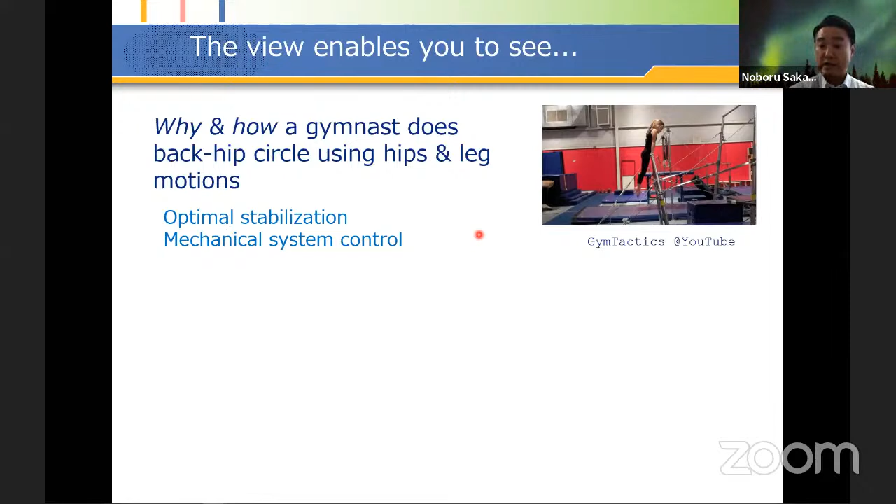Next thing with this view one can see is why and how central banks manipulate interest rates like long staircase signals. We know that oftentimes the Federal Reserve, the European Central Bank, or the Japanese Central Bank manipulates interest rates like this long staircase signal.

So they fix or set a value of this interest rate and let the economics evolve for a long time. At a certain point, they change this rate very rapidly and fix the next value. This kind of control is actually called turnpike, and it arises from econometrics. With this unified view, I hope you will see why these kinds of controls naturally emerge in optimal control analysis and design.

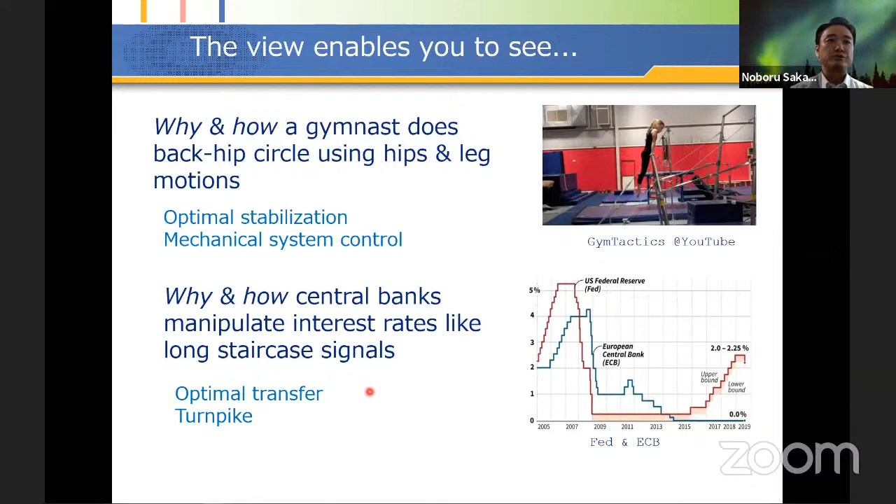For this kind of control, people always want to have some certain kind of optimality. Then we get the Hamiltonian system, right? In physics, the Hamiltonian system plays a very important role in analytical mechanics and quantum mechanics. In this equation, Q and P are often used as the position variable Q and generalized momentum P. In optimal control theory, we also encounter the Hamiltonian system, but this Hamiltonian system does not really have a completely physically meaningful picture.

But in our Hamiltonian system there are two equations. The first one actually represents the physical system, and the second one, for the adjoint variable P, doesn't have a physical meaning, but these are interconnected like this. Actually, this P is related to control, and the control is injected into this physical system, the first part of the Hamiltonian system. So we may be able to think of this Hamiltonian system as our fundamental equation, like equations of motion, and apply many techniques from dynamical system theory.

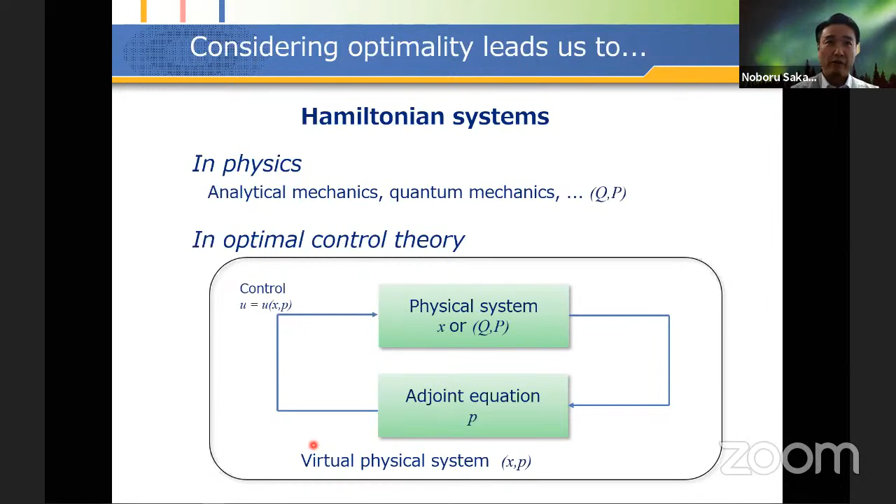Next, let me talk more specifically about these tools from dynamical system theory. For example, Hamiltonian system, Hamiltonian mechanics, and invariant manifold theories are important in this view—for example, volume preservation or energy conservation law, canonical transformation, Hamilton-Jacobi theory, perturbation theory, maybe Poisson brackets. These are also called symplectic geometry in mathematics. Also important tools are invariant manifold theory, such as stable and unstable manifold, center manifold, Grobman-Hartman theorem, and the lambda lemma.

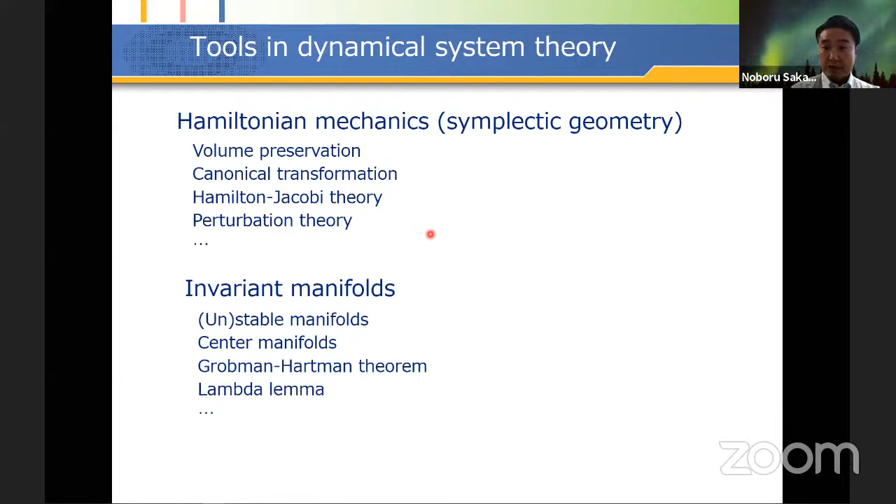In this talk, I will mainly use the stable and unstable manifold and the lambda lemma, but these are actually playing a hidden role in the development of the theory. So let me talk about invariant manifold theory.

Let's consider this ODE, in which the linear part is already block diagonalized with respect to the real part of the eigenvalue. So A is a stable matrix, B has eigenvalues on the imaginary axis, and C is unstable. We can always put any finite dimensional ODE in this form, and these capital X, Y, Z are higher order terms.

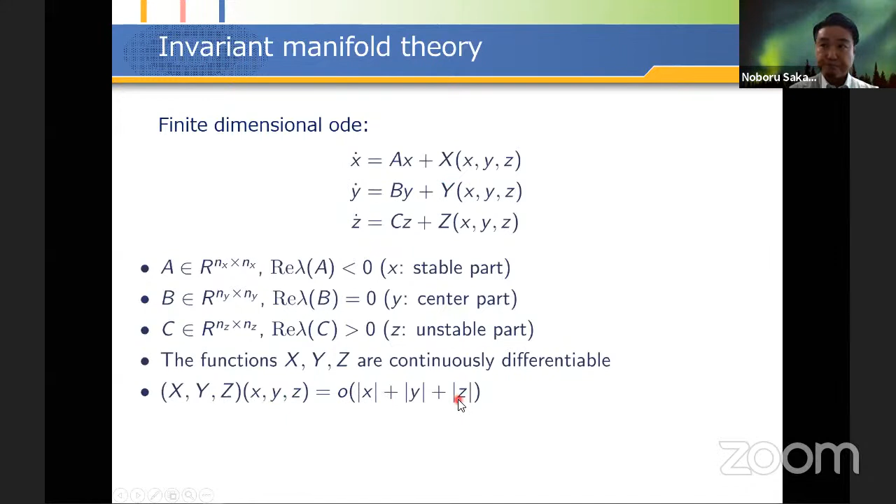Okay, for this system, in 1967, Kelly shows that there exist invariant manifolds, quite a few invariant manifolds. First one is stable manifold, on which X variable is independent and Y and Z are functions of X. On center manifold, Y variable, a variable for neutral stability on the imaginary axis, is the independent variable. On unstable manifold, unstable variable Z is the independent variable. And also center stable manifold, center unstable manifold - these kinds of invariant manifolds exist in this nonlinear system.

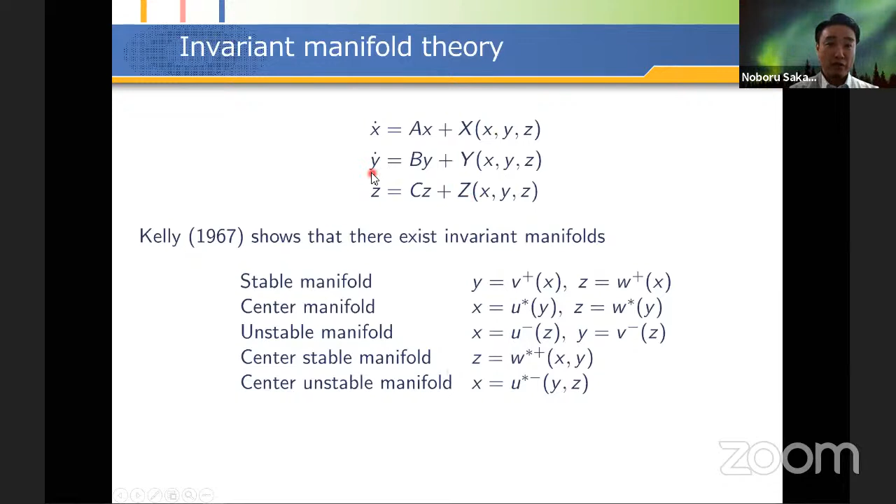And there are several ways of computation that exist. This is what we use for optimal stabilization. So this computation uses iterative computation.

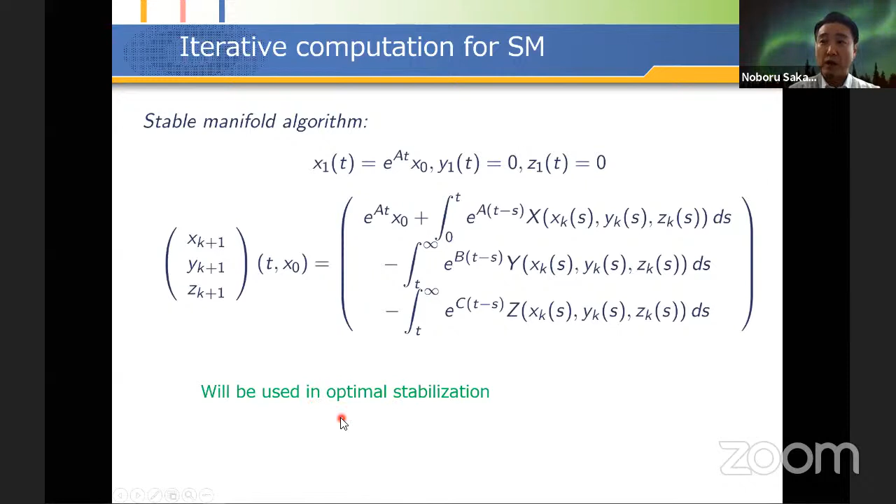Next tool that I would like to explain is a lambda lemma, or inclination lemma. So let's consider this nonlinear dynamical system. This F does not have anything to do with control system F. This is a general dynamical system, independent of control theory. But eventually, this F of X will be our Hamiltonian system derived from optimal control theory. Here, though, this is a totally independent story.

Suppose that this dynamical system is hyperbolic, which means that there are no eigenvalues on the imaginary axis. Then, based on Kelly's result, stable manifold S and unstable manifold U exist. S is k-dimensional - the number of stable eigenvalues is k. The number of unstable eigenvalues is n minus k, in an n-dimensional system. So a k-dimensional stable manifold and an n minus k-dimensional unstable manifold exist at the origin.

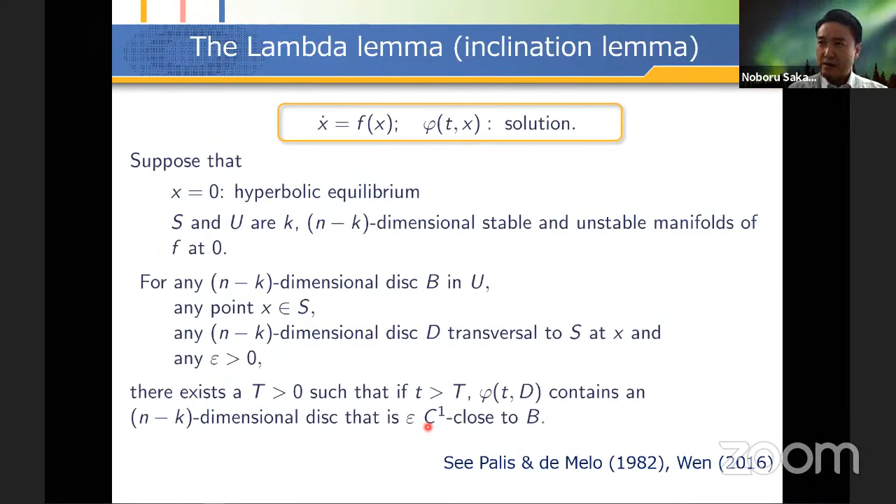It's hard to understand what is really going on, so I draw a simple picture. This is the fixed point, and this is the unstable manifold, this is the stable manifold. So take any B in U, and the dimension of B is the same as U. Take any B, any place is fine, and take any X on S, and take any disk D that looks perpendicular to S - actually only the transversality is important. The dimension of D is n minus k, same as U or B.

Let this D flow according to the flows of the solution. Then this disk D will be mapped somewhere here, and somewhere here as T gets larger, and somewhere here, exponentially stretched like this, and exponentially squeezed toward the unstable manifold U. Therefore, we can always find in the image of D by this flow something extremely close to this disk B. And this closeness can be evaluated using the C1 norm.

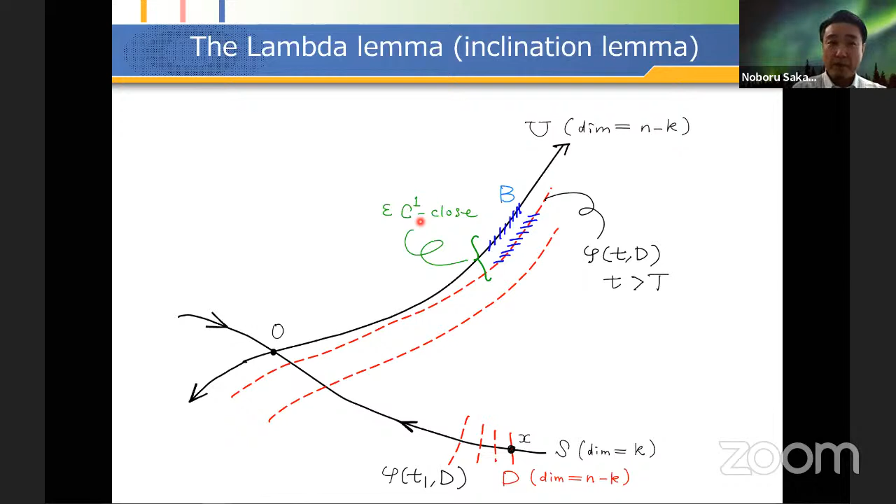Roughly speaking, stable manifold theory only tells you how the solution behaves on this curve or on this curve. But the lambda lemma tells you how the solution behaves off the manifold.

So this is very important to see what can really happen in our Hamiltonian systems derived from optimal control theory. Using this lambda lemma, we can prove this property. Suppose x equals 0 is the hyperbolic equilibrium of this dynamical system, and S and U are K and N minus K dimensional stable and unstable manifolds respectively.

Take any x0 on S and any x1 on U. Then there exists a T0 such that for every T larger than T0, there exists a rho, which can be very small, and y0 in the vicinity of x0 on the stable manifold, and y1 in the vicinity of x1 on the unstable manifold, such that this holds. This means the solution of a two-point boundary value problem has a solution.

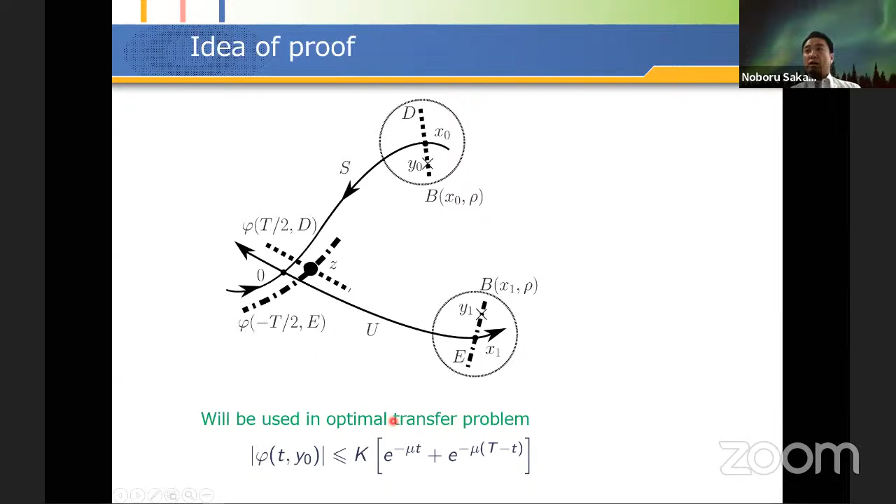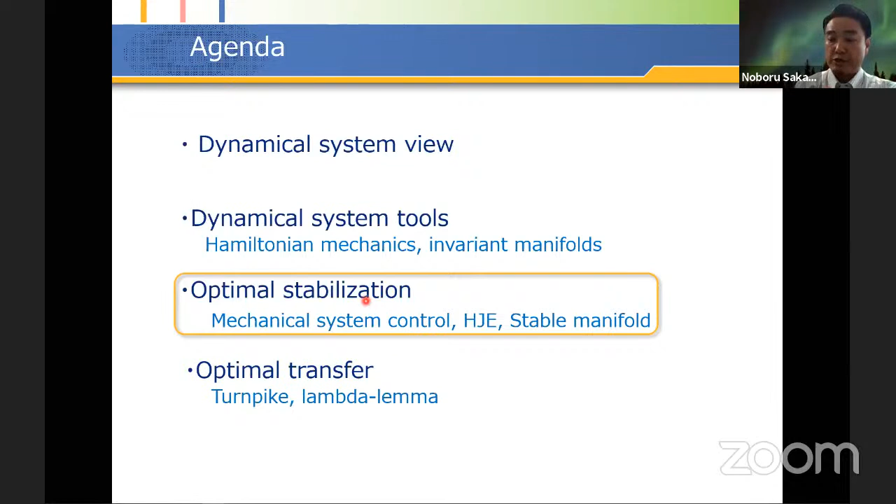This inequality will be used in the optimal transfer problem. Next, let me talk specifically on the first optimal control problem, optimal stabilization. In this talk, I will discuss two optimal control problems: optimal stabilization and the optimal transfer problem.

In the first problem, the horizon is infinite, and we want to find the control U, overall U, such that the solution X goes to 0 as T goes to infinity. In the second problem, the horizon is finite but large, capital T, but the destination state is designated. So starting from X0, the solution has to end at XF. This is the second problem.

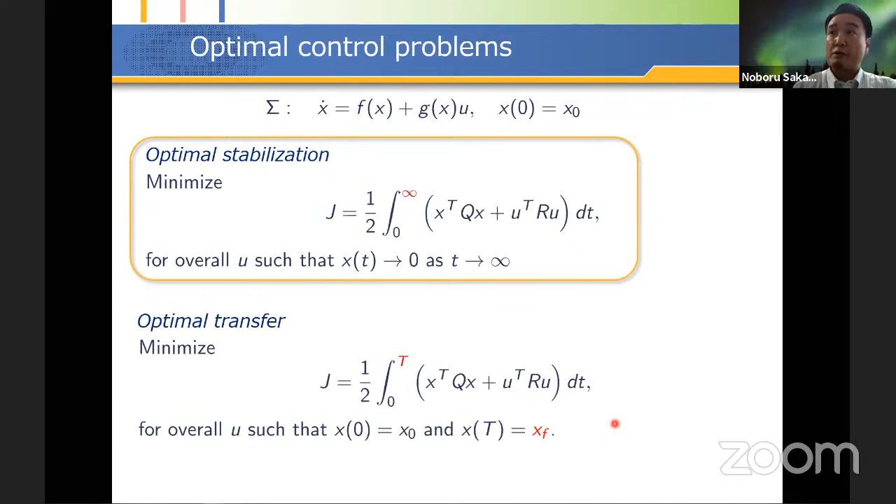Let me talk on this first problem. This is a known, very well-known theory. First, deriving the Hamilton-Jacobi equation for V, an unknown scalar function V. If we can find a solution for this Hamilton-Jacobi equation, the optimal control is represented as a feedback like this.

This result is known since the 60s, but the solution methods for this Hamilton-Jacobi equation were very limited. Only a few methods were proposed, but applications were reported almost nothing except for simple numerical examples.

In 2008, Van der Schaft and I proposed the stable manifold method for this Hamilton-Jacobi equation. Let me talk about that.

So this is the Hamiltonian, the left-hand side of the Hamilton-Jacobi equation. We wrote dVdx1, P1, using these P variables. And the Hamiltonian system derived for this Hamilton-Jacobi equation can be written like this. This A is the derivative of this F. F is this control system, this F comes from this control system.

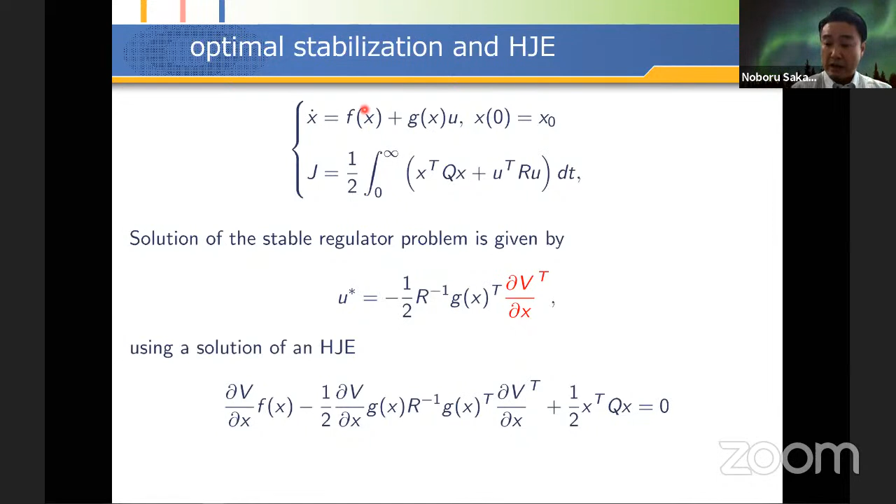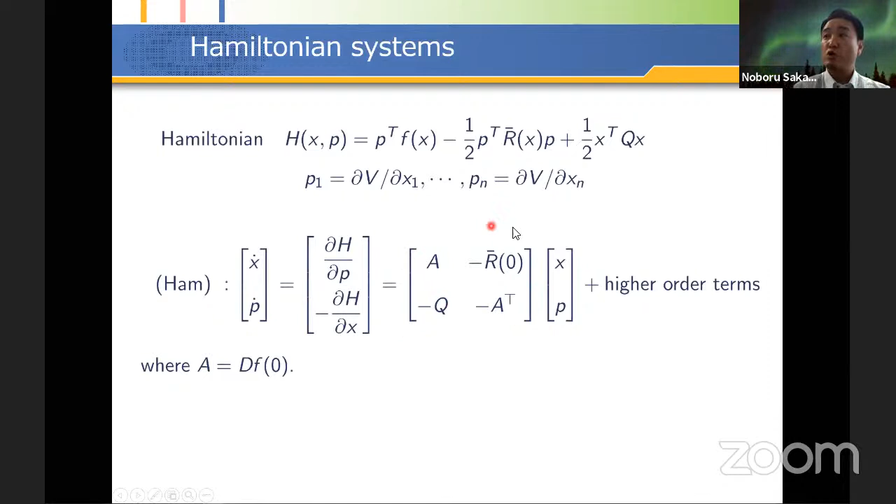And okay, this represents a first order term, and this is a higher order terms. And we suppose that this Hamiltonian matrix has no eigenvalues on the imaginary axis.

The important fact which was proved by van der Schaft is the following: stable manifolds of hyperbolic Hamiltonian systems are Lagrangian submanifolds, which means that they are integrable.

So using this, if we can write the stable manifold of a Hamiltonian system with this expression using some function p of x, then this integrability means that there is a function v of x such that this p of x is actually a gradient of this v.

So this manifold is generated by this single scalar-valued function v. This is called integrability. And actually, this v is the solution for the Hamilton-Jacobi equation.

And the optimal control can be represented like this, using this p. So obtaining the stable manifold is almost equivalent to obtaining this optimal feedback.

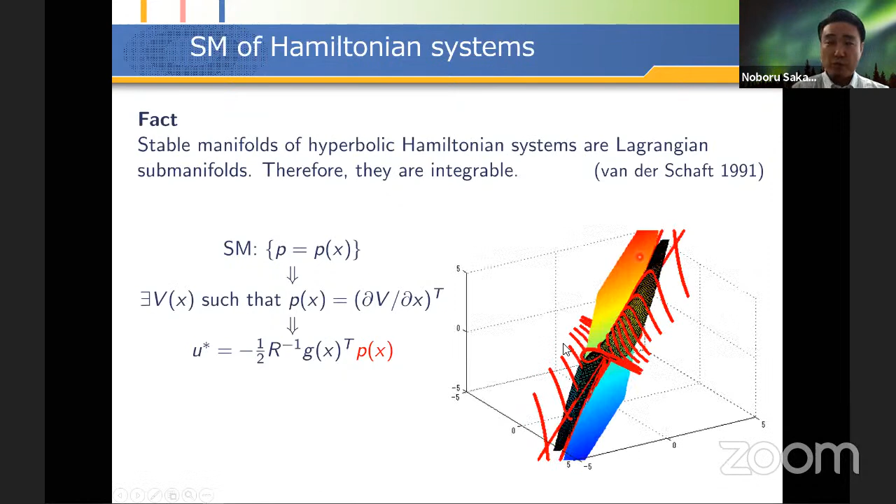So this picture shows the stable manifold of a simple two-dimensional problem. This hashed surface is the stable manifold around the origin. This point here is the origin, and this flat surface is the solution by the Riccati equation. So this stable manifold is tangent to the solution by the Riccati equation.

So the application flow of this stable manifold method can be written like this. First, we get the Hamilton-Jacobi equation, take a Hamiltonian system, and check the hyperbolicity, and apply the iterative computation that I explained in the tool section, and theoretically use this Lagrangian submanifold property, this integrability of the stable manifold.

So we apply some kind of approximation. Anyways, we need to do some kind of approximate computation. So we approximate this stable manifold P by this pi. And using this approximated function pi, our optimal control looks like this.

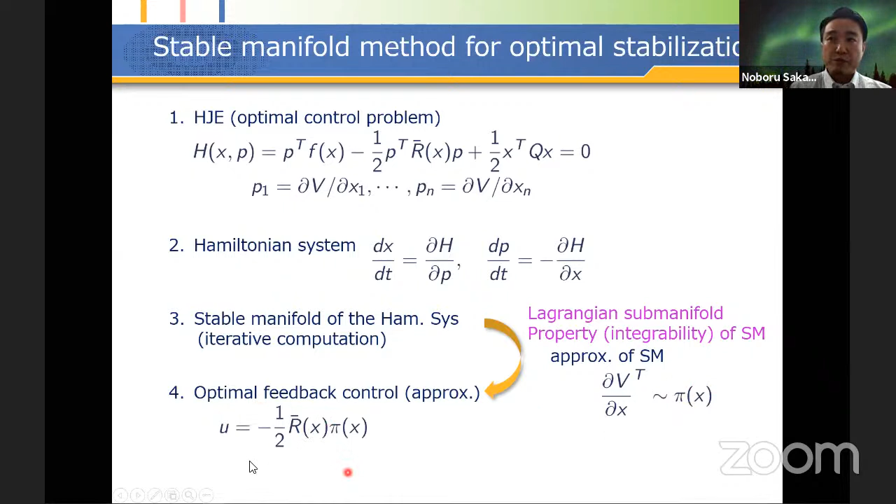This is the story of how to apply this stable manifold method. And we had worked on quite a few applications. And let me show you some experimental results.

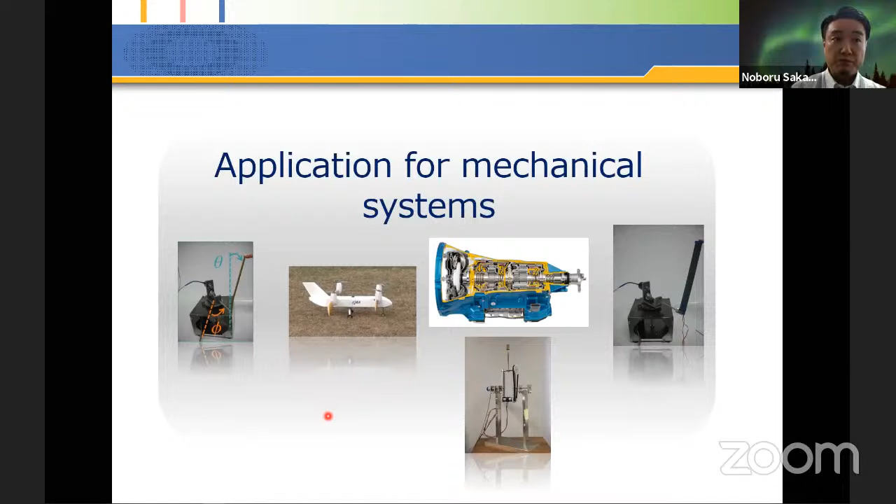First one is swing up and control of a flexible inverted pendulum. We also worked on a rigid inverted pendulum, of course, but this flexible one is quite interesting. So let me talk about this.

So this motivation comes from this kind of space structure, which is inevitably flexible due to the light weight. But we want to maneuver this flexible structure in an optimal way, with fast motion, like agility. Then we need to consider nonlinear optimal control of flexible structures.

And this inverted pendulum with the spring steel flexible beam represents this kind of problem. So as you all know, this is an inverted pendulum, but this is a flexible beam.

And so we derive a nonlinear Lagrange equation, which is a four-dimensional equation, and consider optimal control, which gives you an 8-dimensional Hamiltonian system, normal.

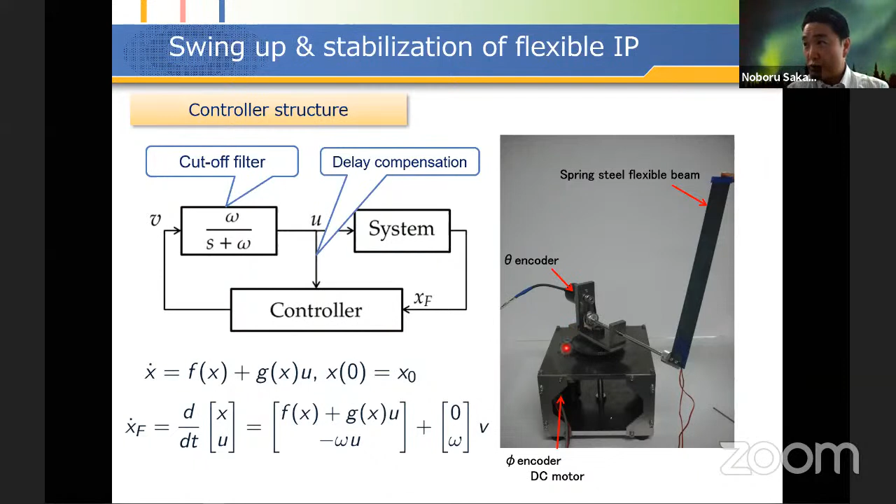But okay, let me show you the experiment result. I hope the video is enough.

So with this simple application of linear control, as we saw, due to spillover instability effect, it gets unstable quite easily.

So we append a cutoff filter here, a one-dimensional cutoff filter, to attenuate the flexible mode. And then we get a five-dimensional system, actually. And consider optimal control, stabilization, which gives me a 10-dimensional Hamiltonian system. And we computed the five-dimensional stable manifold by an iterative method.

And we applied this nonlinear control. First, we apply linear control with this filter. Okay, then it is smoothly stabilized, right?

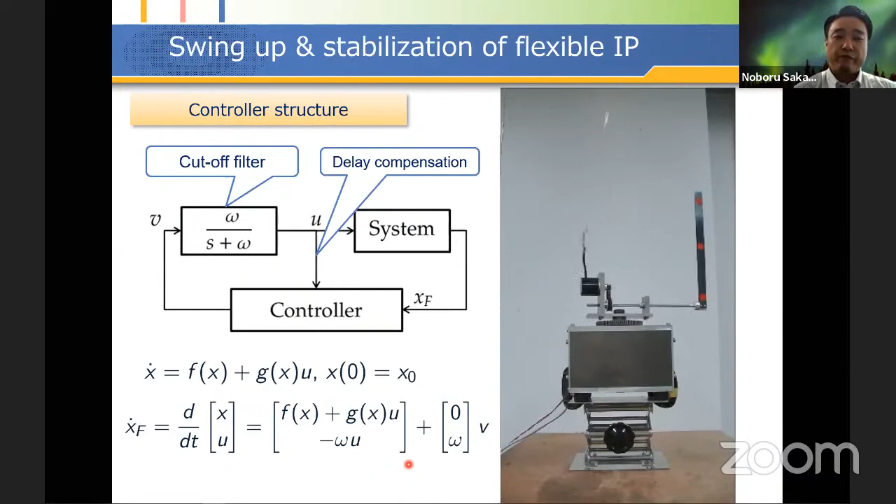Okay, next, let me talk a little bit about Acrobot swing up. This is similar to the video that I showed at the beginning. Actually, this robot is trying to mimic gymnastics. Okay, let me show how this apparatus behaves.

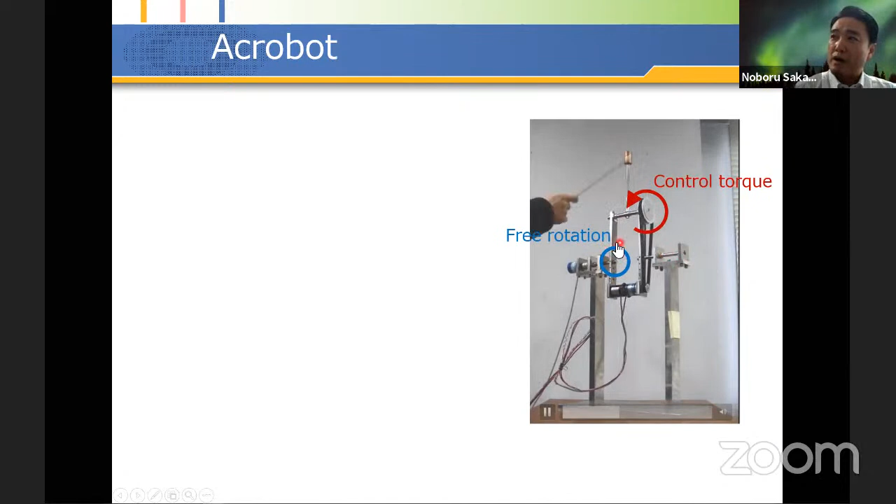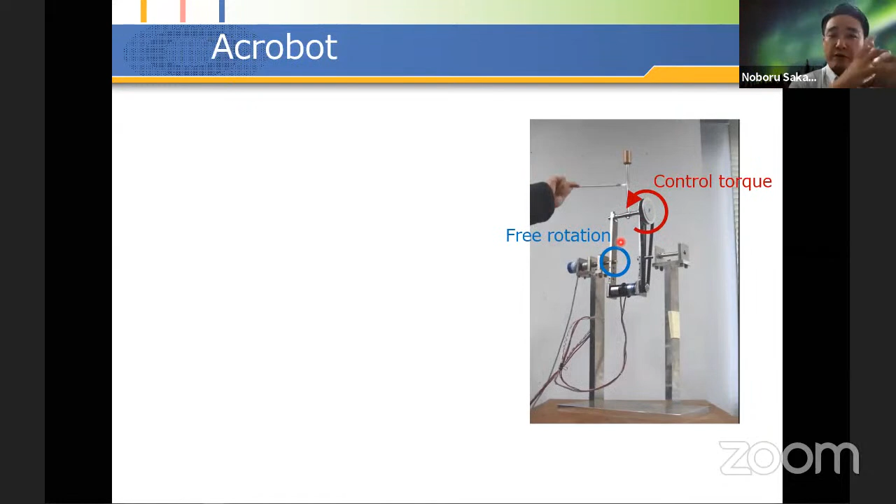So this is like a high bar. This rotation axis here is the high bar. And this is a gymnast, trying to stand upside down on this high bar and using his or her legs or hips to balance at this upright position. This is called the Acrobot system, and it attracts a lot of attention in nonlinear optimal control theory and application.

So actually, this system has 4 equilibrium configurations. The easiest one is this down-down mode. And obviously this up-up mode is also one equilibrium configuration, but of course unstable. And actually the body is up, the leg is down, is also another equilibrium, and the fourth equilibrium is body down, but leg is up.

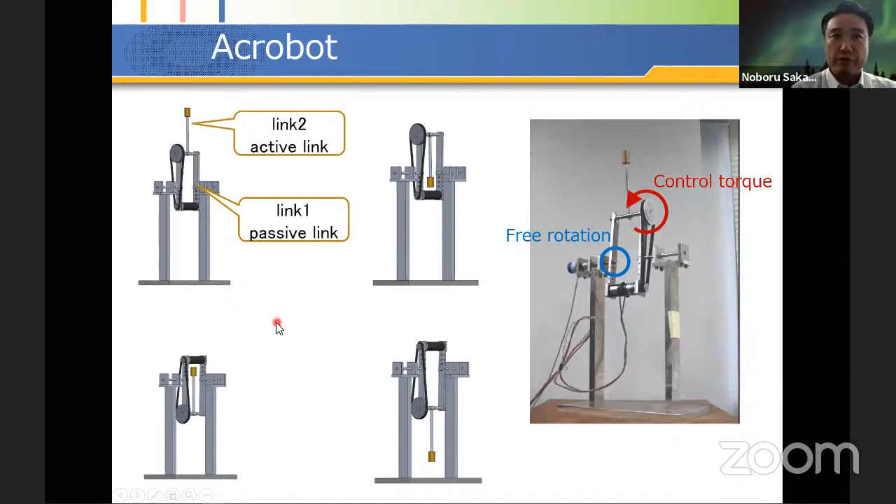And most research on Acrobot is focusing on the swing up control from this down-down mode to the up-up mode. But we apply this nonlinear optimal control theory using stable manifolds for all kinds of transitions. And let me show you experiments.

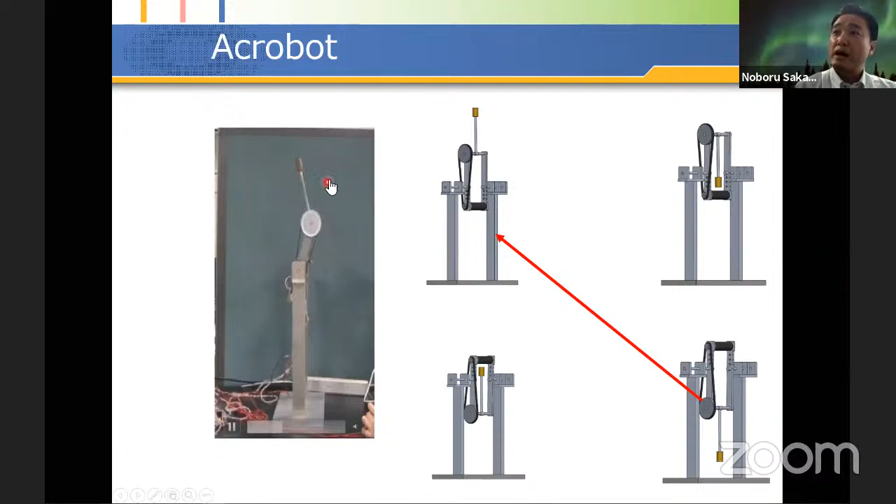This is the one popular in nonlinear optimal control, so from down to up. As you can see, this control nicely uses the leg motion and uses this reaction to move this body up. All right, and the next one is from here to here.

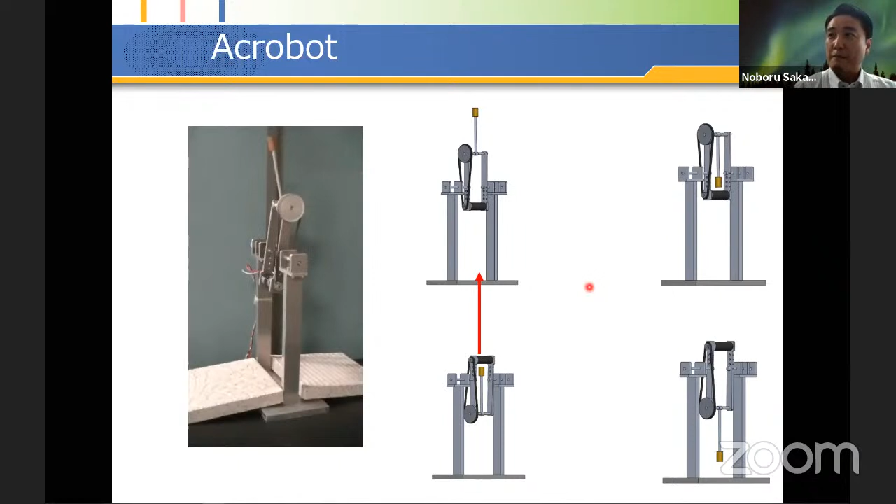Using the reaction of the leg, it nicely goes up and stabilizes. And the next one is this.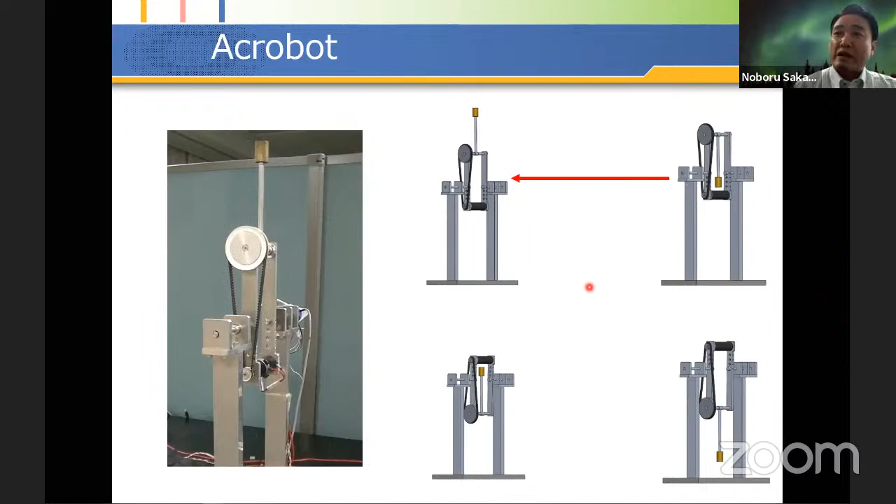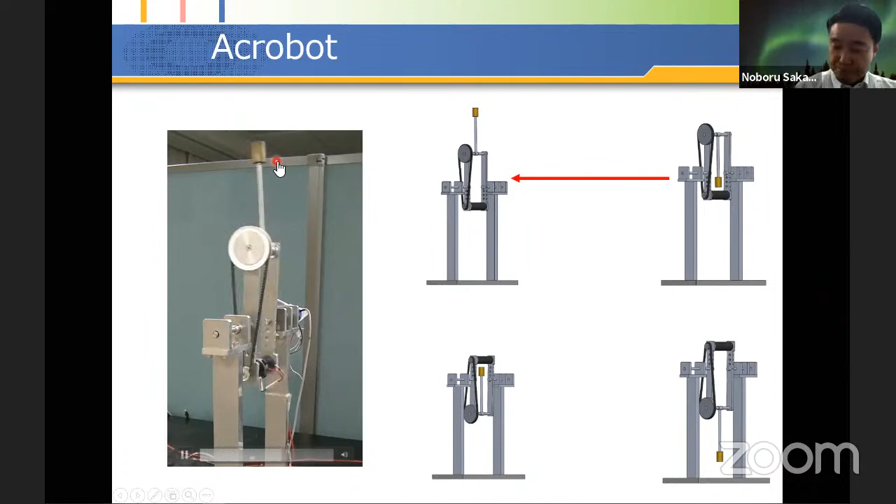This doesn't look so fascinating, but actually this is not so easy, because except for this down position, all three equilibria are unstable. So even this first configuration at t equals 0 is unstable. But to keep the body from falling down, this leg moves in the opposite direction, so that the body doesn't go down, but the leg is lifted up.

And the last one is quite an interesting motion. Using this rotation of the leg, the body goes up and stabilizes. These kinds of very nonlinear motions can be stabilized using the stable manifold method. Oh, there's another one.

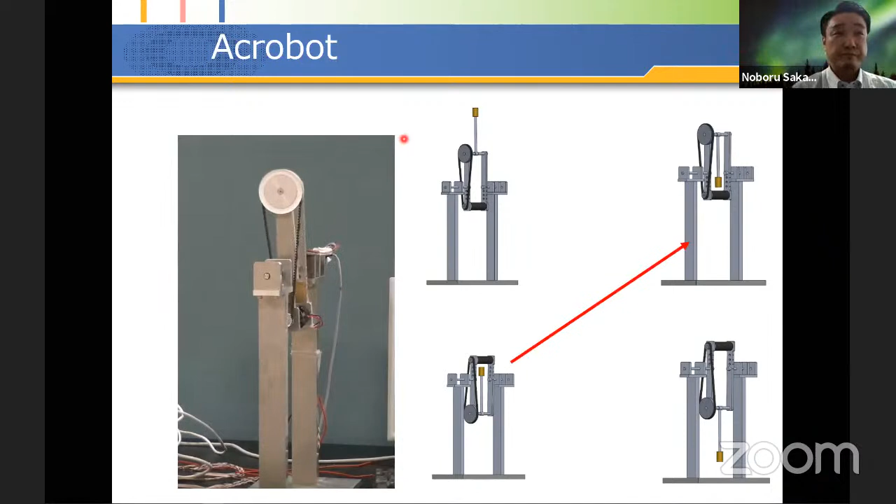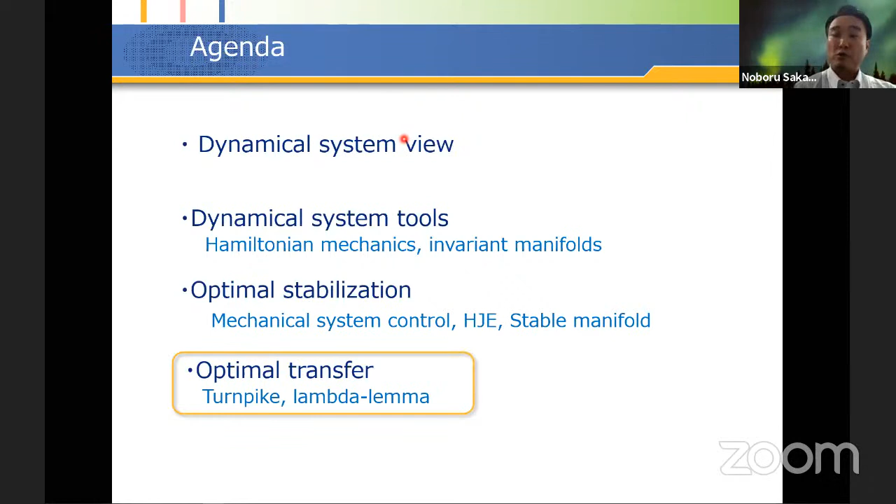Let's move on to the second optimal control problem, which is optimal transfer, starting at x0 and going to designated xf. This comes from econometrics, actually, and it's called turnpike because this theorem tells you that no matter where the initial point and target point of your system are located, the optimal strategy is to go to this equilibrium path, called the Neumann path, and stay there for a long time, and at a certain time exit or go to this target point.

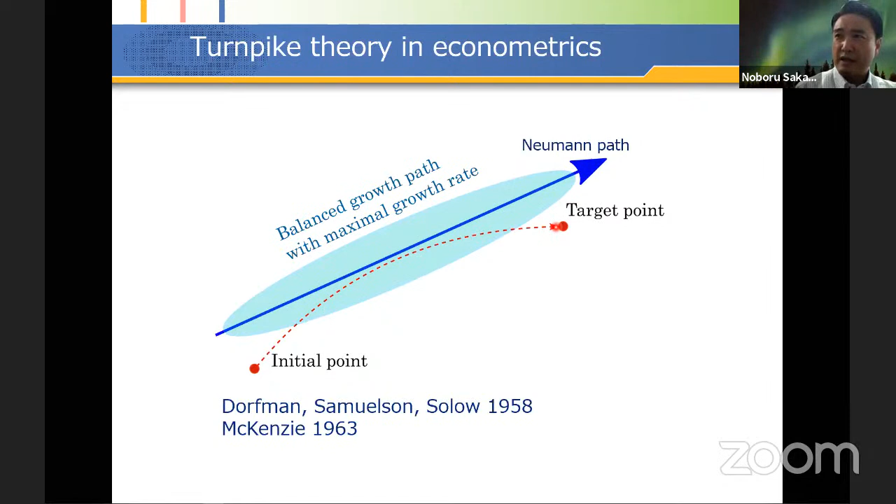This phenomenon is known to be optimal in econometrics. And the word turnpike comes from this metaphor.

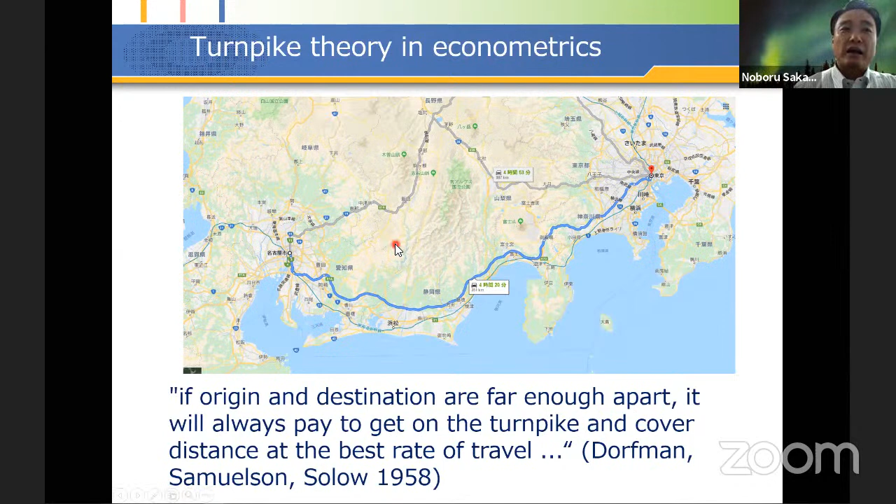So no matter where you are, this is a picture of my city here, Nagoya, near Tokyo, and this line is a highway, a turnpike. So no matter where you live near Nagoya, and no matter where your destination is near Tokyo, the best strategy is to take the highway and cover long distance at the best rate. That's the turnpike. This is a quite normal strategy for everybody, and this kind of control strategy is called turnpike.

So, rigorously, the definition of turnpike is written like this. For any epsilon, which is normally small, consider the XU space, and take an epsilon ball. This means that the point XU is outside of the epsilon ball. And this means that the set of T for which this point XU is outside of the epsilon ball is bounded by this eta epsilon, no matter how large this capital T is.

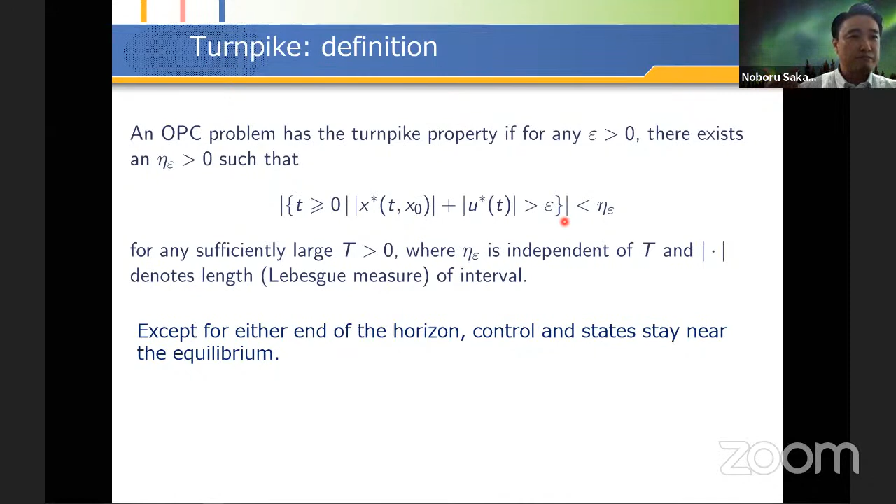Which means that most of the time, because T can be large, but this bound is still bounded, and this eta epsilon is independent of this horizon T, most of the time this point XU stays inside of this epsilon ball. So this looks like the hyperbolic dynamical system behavior that I explained using the lambda lemma.

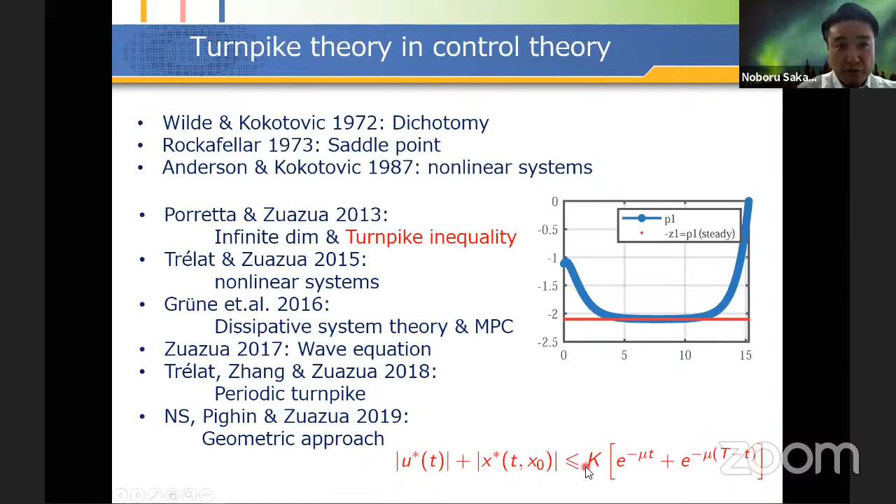And why is turnpike so important? Because turnpike often tells you how to simplify control problems and control systems, like a staircase control signal used by central banks. And this simplification does not depend on destinate states or horizon length. This is quite important in turnpike.

And turnpike attracts attention in the field of MPC control, optimal shape design, or sparse control, which is recently called maximum hands-off control. This means that, like a central bank's manipulation of interest rates, once they fix a certain value of control, they hand off. They don't manipulate for a very long period of time. Once they fix it, they let the system go without any control—hands off.

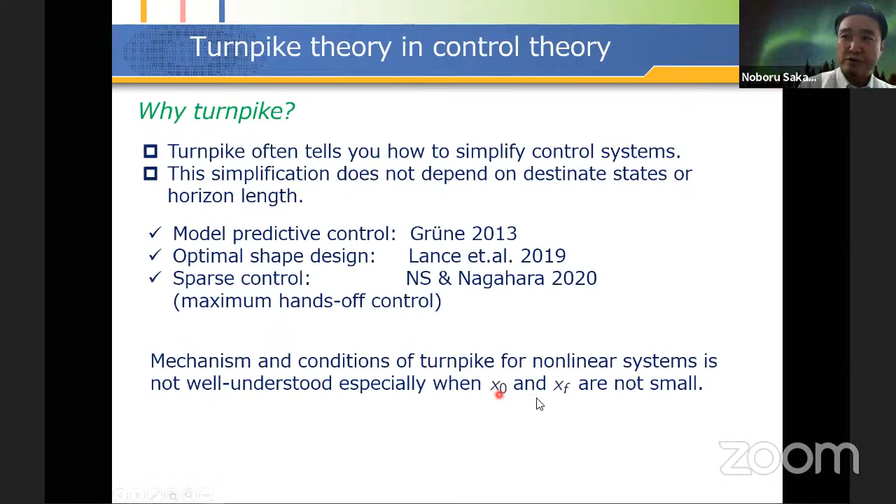So this kind of sparse control, maximum hands-off control, has gotten a lot of attention recently as an environmentally friendly control strategy. And the mechanism and conditions of turnpike for nonlinear systems are not well understood when the initial condition and final destination are large. So this is the problem, and we wish to clarify the conditions under which the optimal transfer problem has a solution that exhibits turnpike.

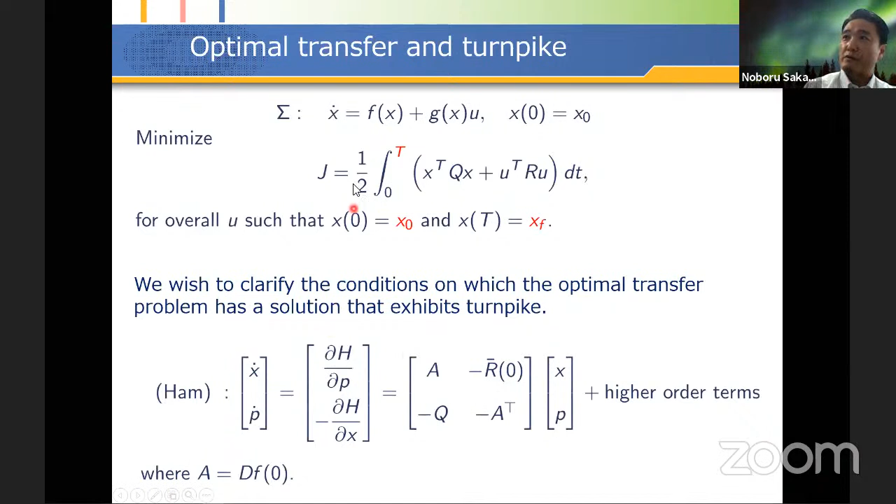So this is the Hamiltonian system derived from this optimal control problem. First we'll try to find the solution graphically. We assume the hyperbolicity of this Hamiltonian matrix, and then we have an unstable manifold U and a stable manifold S at the origin. Remember how flows behave along or around these manifolds, okay?

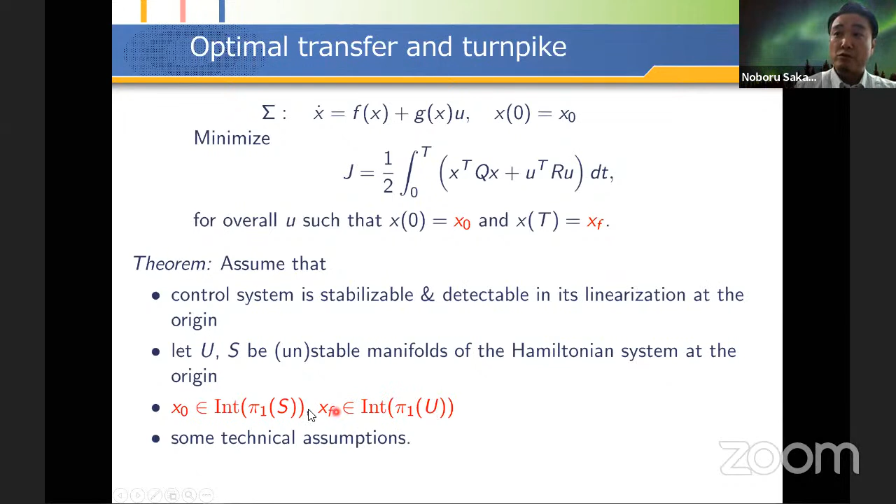So assume that the linearization is stabilizable and detectable, and then the stable and unstable manifolds exist. If your initial point is the projection of S to the base space, pi1 is the projection, and if your destination is in the projection of the unstable manifold U, plus some technical assumptions, then for large T, the optimal transfer problem has a solution which satisfies the turnpike inequality. We can prove this using the lambda lemma.

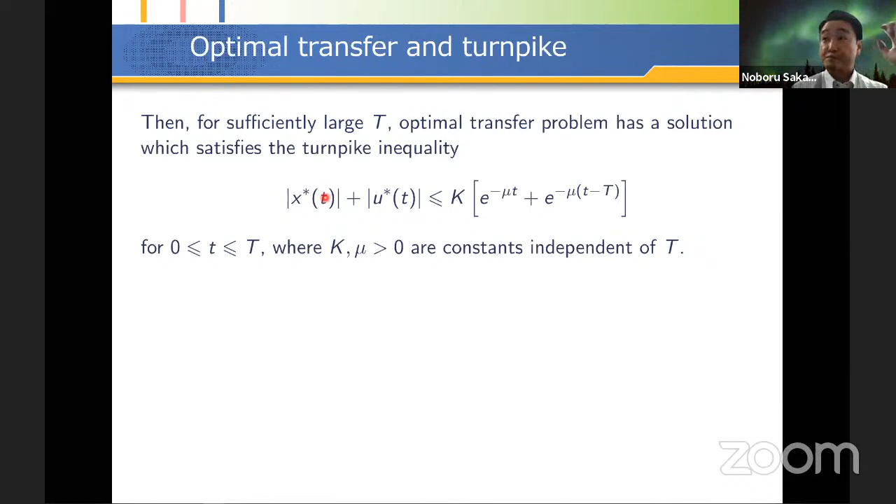Let me show you one simple numerical example of a nonlinear system, a very typical cost functional. I'll completely omit the computation, but you can show that the unstable manifold has this structure, and this stable manifold S satisfies this condition. This is not so easy, but let me omit the detail. This means that if you take the destination satisfying this condition, like xf1 is 0, here x1 is 0, so xf1 is 0, and take any initial point, because of this, you can take any initial condition.

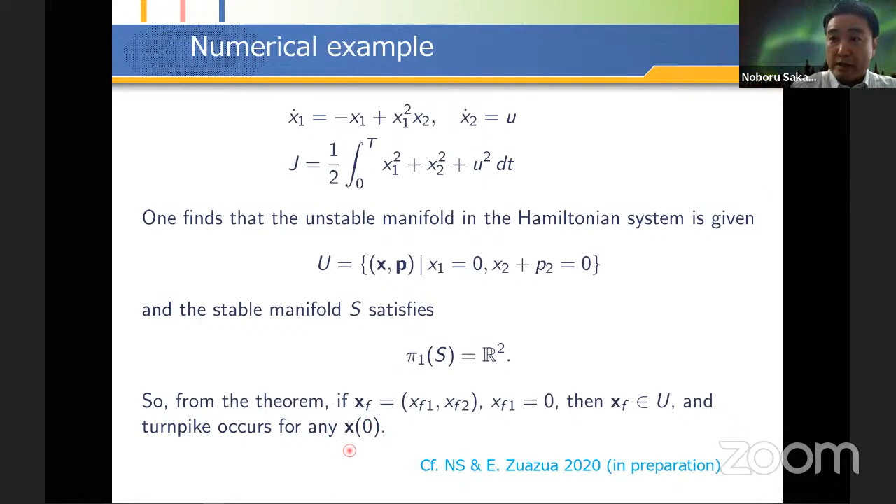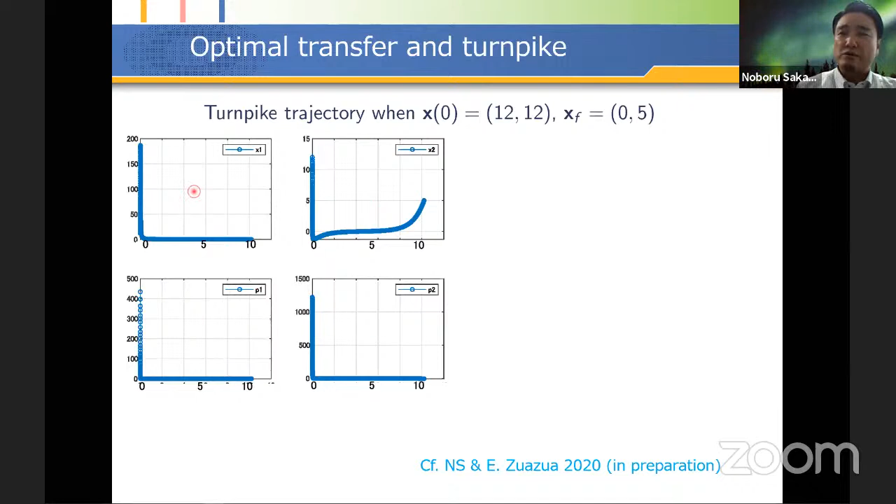Then turnpike occurs. This is the figure of the turnpike trajectory starting from 12, and xf is (0, 5), x1, x2, p1, p2, but it looks quite weird. Looks quite weird, right? Because starting from 12, but this reaches almost 200. But actually, if you zoom in on the initial time between 0 and 0.1, starting from 12, x1 grows really, really large, but it still shows turnpike behavior. So turnpike is confirmed, but in this phenomenon we can see nonlinear peaking, which is quite a problematic phenomenon in nonlinear stabilization problems. This is occurring in this trajectory, but it's still turnpike.

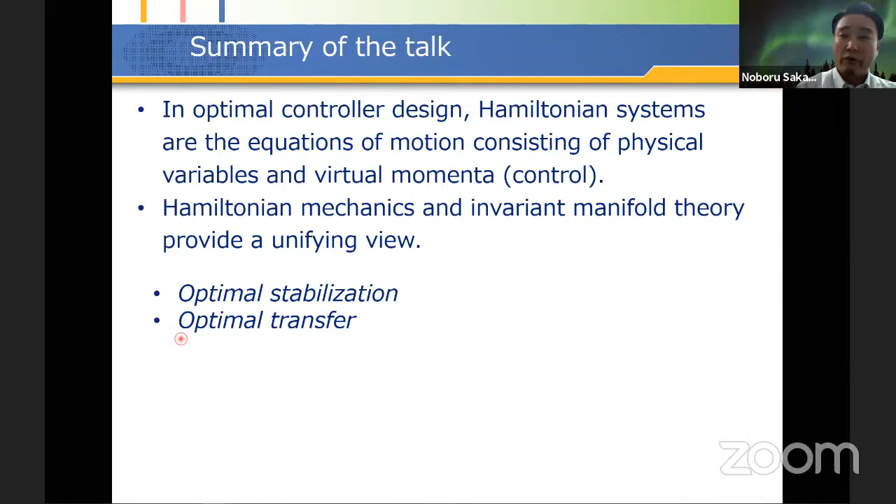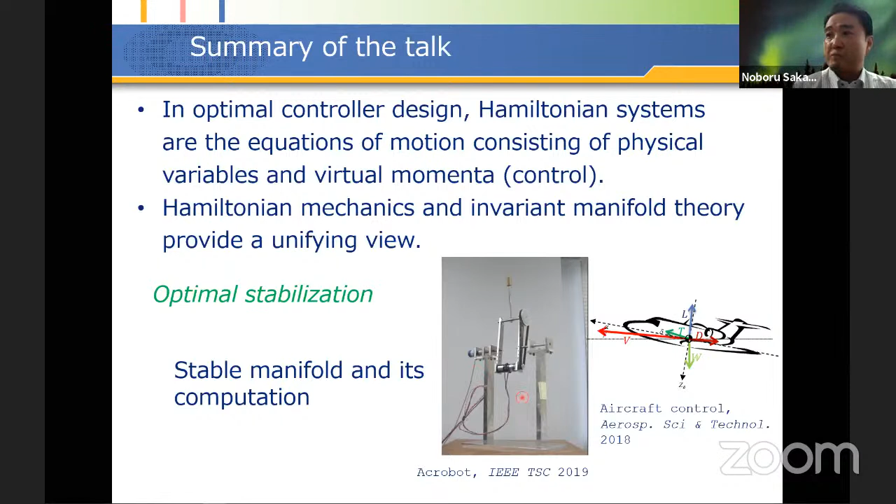So let me summarize my talk. I tried to show a unified view using a Hamiltonian system, derived from the optimality condition for nonlinear optimal control, as the fundamental equations of motion, and apply nonlinear or dynamical system tools such as Hamiltonian mechanics or invariant manifold theory. Then I considered two types of control problems. For optimal stabilization, the stable manifold and its computation play a very important role. We have this kind of acrobot application, aircraft control application, and also maglev control with constraints.

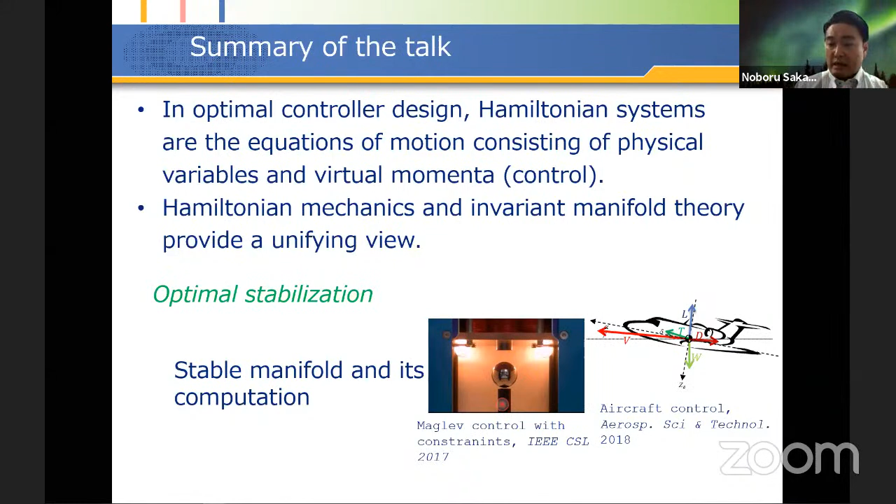And the second problem, the optimal transfer problem, turnpike theory is attracting a lot of attention, and using this unified view with dynamical system theory, specifically the lambda lemma, we have a framework that easily explains why turnpike phenomena occur.

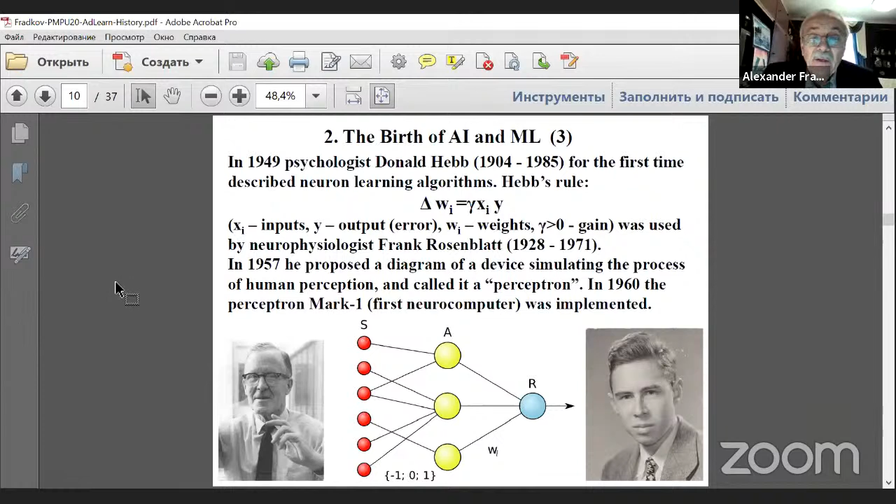Now let us jump to the brief history of adaptive systems, which was in parallel. There was no interaction between control science and artificial intelligence at that time, and for a number of years afterward.

The start of adaptive system theory is related to the famous MIT rule. It showed how to tune the gain of a controller in a scheme with a reference model, when we have a model of our desired motion and a real plant whose gain we don't know, and instead we tune the controller gain to make the motion of the closed loop system close to the motion of the reference model. The MIT rule was proposed by Whitaker and others, and it's very simple. That's why it became popular.

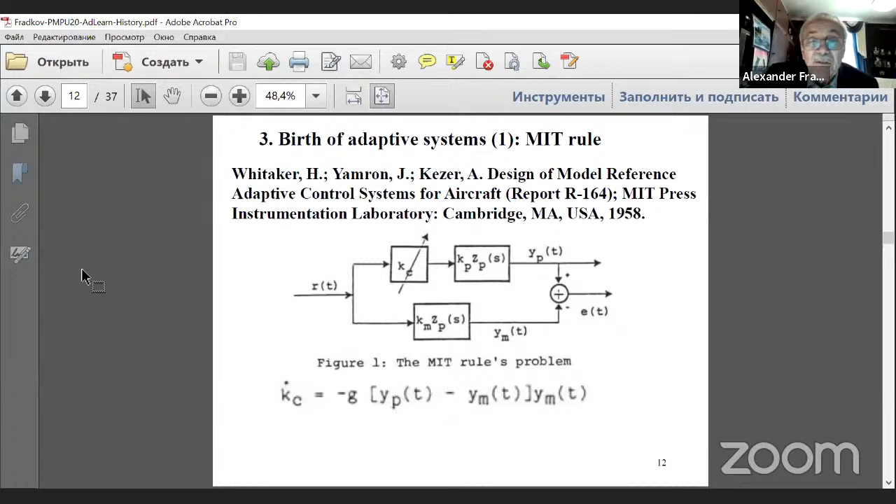Many people tried it, but sometimes it didn't work, and in real experiments it was not successful. I quote a later paper by famous researchers, Brian Anderson, Mareels and others, 1987. They revisited the MIT rule and for the first time proved conditions for when it works and when it doesn't. In experiments there were some failures of adaptive systems based on this rule.

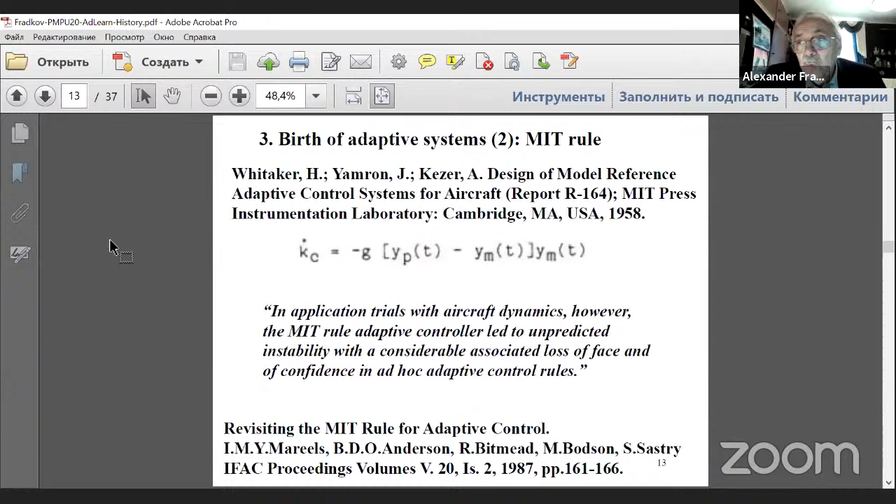Therefore, theorists worked to improve this rule and create new ideas in a theoretical way. The milestone paper was by Patrick Parks in 1966, who proposed using the Lyapunov method for design of adaptive systems, particularly for the adaptation algorithm.

In a more general multivariable setting for systems with a reference model, for a linear controller, the adaptation algorithm looks like this: it's a quadratic differential equation whose right-hand sides are quadratic. This design was very successful because it was rigorously justified and rather general, and many people used and developed it further.

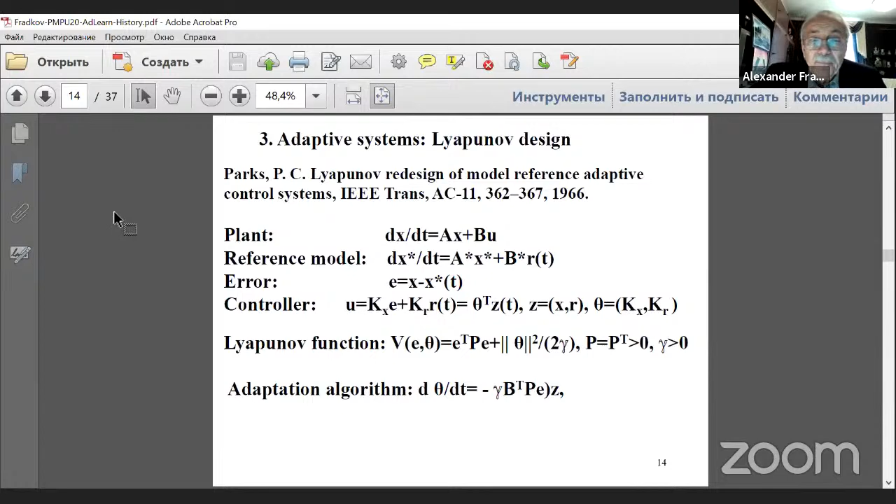Later it was even extended to a nonlinear setting, for nonlinear plant dynamics and possibly a nonlinear controller. Adaptation algorithms can be designed using the so-called speed gradient principle, if you have a goal or objective function. You evaluate the velocity of change of the goal function along trajectories of the plant, then evaluate the gradient of that speed with respect to the adjustable parameters. This simple construction works well because a Lyapunov function can be used to prove its convergence.

Later it was extended in several directions. Just recently, Maxim Dolgopolik extended it for non-smooth and discontinuous cases. By the way, Maxim Dolgopolik graduated from the Faculty of Applied Mathematics and Control Processes of St. Petersburg University, and two years ago he received an award from the St. Petersburg Mathematical Society for best young mathematicians.

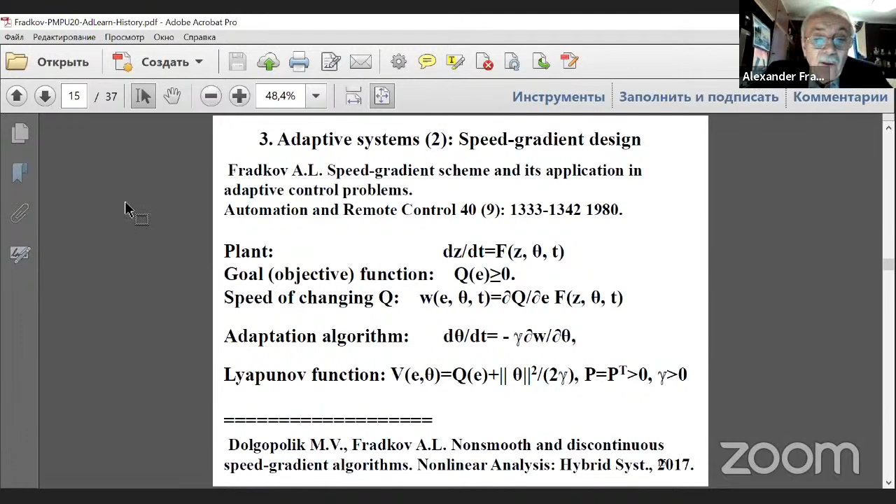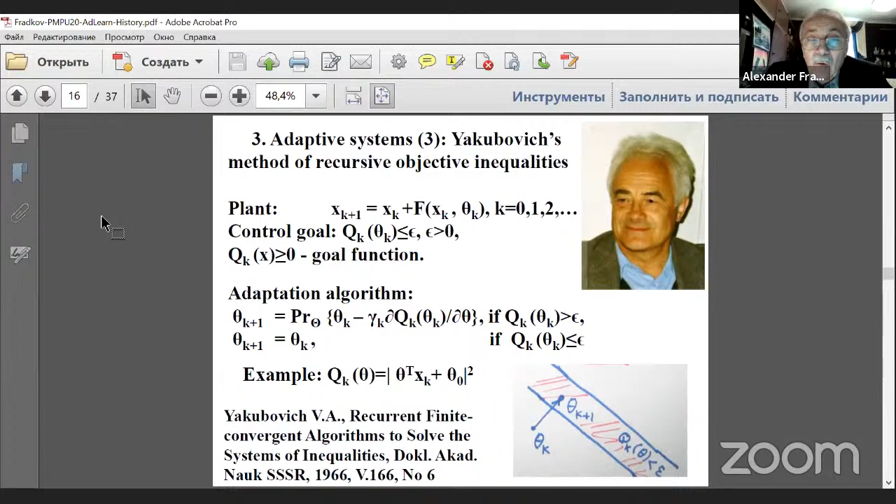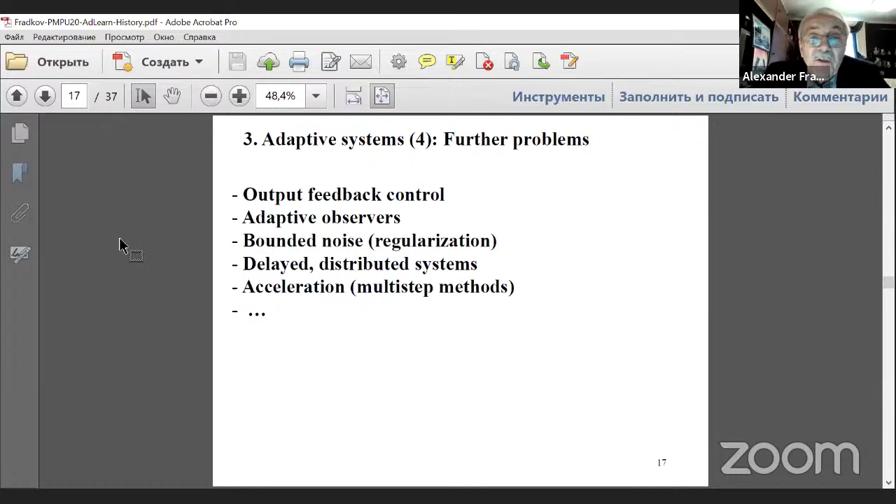But since we are speaking about a brief history, very brief, we don't have time to go into all these problems and results. The literature is huge on adaptive control. Now let us come back to machine learning and artificial intelligence.

In the 60s, there was a growth of interest in cybernetics and learning algorithms, pattern recognition. Rosenblatt's results were very popular at that time, and in many countries, including Russia, the Soviet Union, people worked in this area. Also other results in artificial intelligence, like fuzzy systems and the first chatbot, were proposed at that time in the 60s.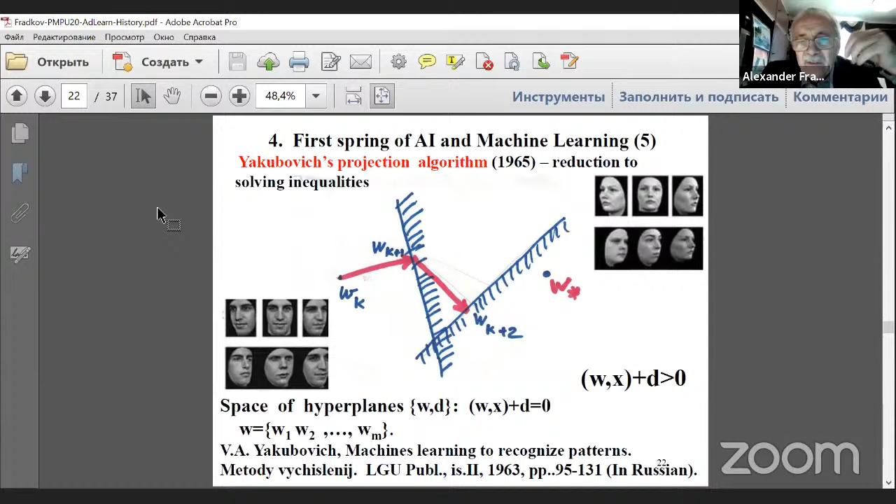And this idea was implemented by Yakubovich in his next paper, and another paper which I mentioned by Yakubovich related to adaptive systems. So the same algorithm can be used here.

The understanding that the same algorithm may be used both for adaptation and for learning was explicitly promoted by Yakov Tsypkin from Moscow, a famous Russian researcher. He published a book in 1968 in Russian, which was translated into English in 1971. The book was entitled exactly Adaptation and Learning in Automatic Systems.

It's a very interesting book. I purchased this book when I was a student, at the end of the 60s, and I was excited with this book. I was trying to follow the ideas of this book for many years.

The key point in this book is to use general iterative algorithms for solving uncertain optimization problems to solve different adaptation and learning problems, for example pattern recognition. These are the chapters of this book. The same algorithms are applied to pattern recognition, to identification, to filtering, to control, to study reliability, operation research, and games. So it looks like the same method can be used for solving quite different, completely different problems.

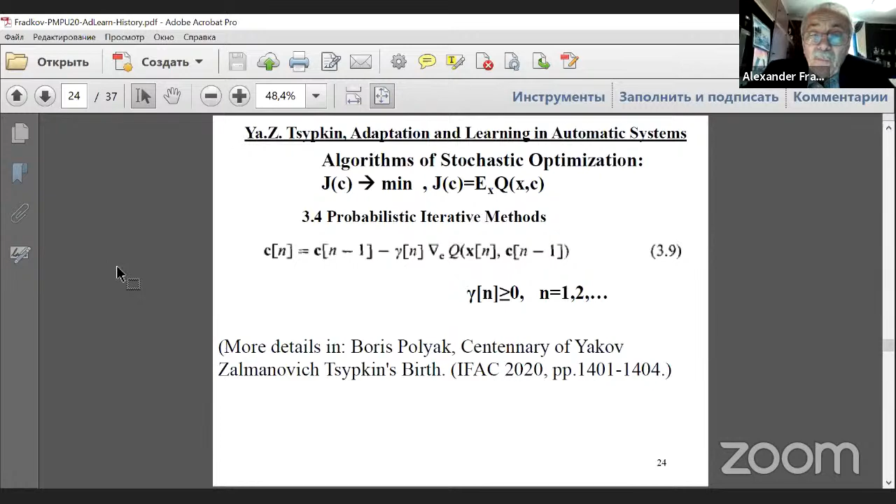What is also interesting in the book by Tsypkin is that he not only introduced the idea of a similarity of algorithms, he even demonstrated how different algorithms used by different authors and published in different papers can be derived from his scheme. He put tables into the book, not one, but several tables, and there you can see the names of the authors whose results were published in different papers, but can be derived from the scheme of Tsypkin.

These authors are Yakubovich and Aizerman and other people, and also Professor Vapnik, who is a famous expert in machine learning, famous even now - I will speak about him later. His results, his algorithms, also can be derived from this scheme.

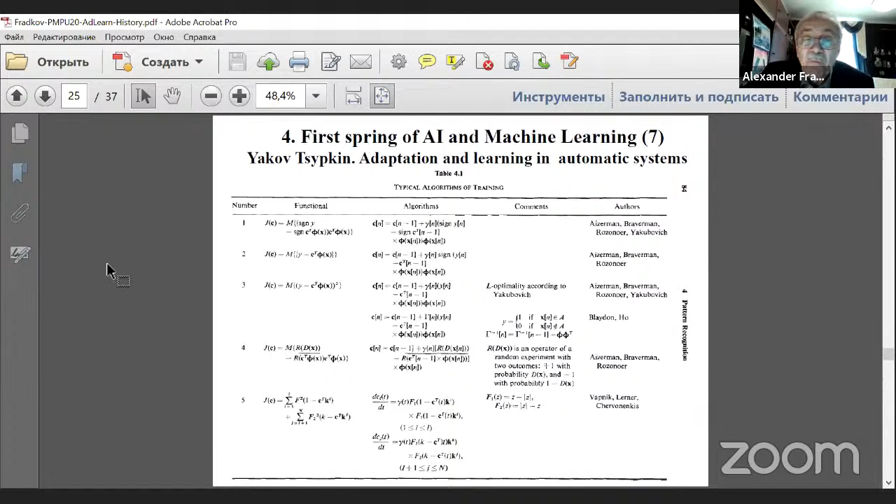So after this golden age of the 60s, in the 70s, interest in learning and artificial intelligence was not very strong. It was caused by several reasons. First is the publication of the book by Minsky and Papert, Perceptrons, where the idea of artificial neural networks was criticized. It was shown that a single layer perceptron cannot implement the simplest logical function, XOR. It was like a splash of cold water to people, to researchers. And some other failures happened simultaneously.

Some bad experiments with all-terrain vehicles, and some not successful Japanese supercomputer projects, which were closed, and some other negative results were obtained. For example, the so-called combinatorial explosion of a number of algorithms to solve complex problems was discovered.

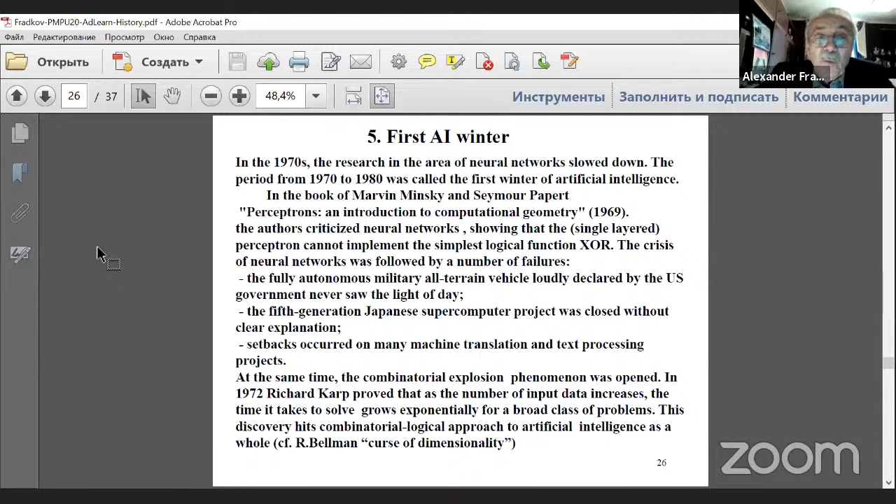Richard Karp discovered that if the number of input data increases, then the time for solving problems grows exponentially for a broad class of problems. This phenomenon was also known under the name of curse of dimensionality, introduced by Richard Bellman, but it had a negative influence on the combinatorial logical approach to artificial intelligence. Funding was reduced, and the number of researchers decreased at that time. That's why it's called winter.

After that, however, in the beginning of the 80s, there was a second spring of artificial intelligence, caused by a couple of inventions. Production method expert systems were introduced, which happened to be the first industry application of artificial intelligence.

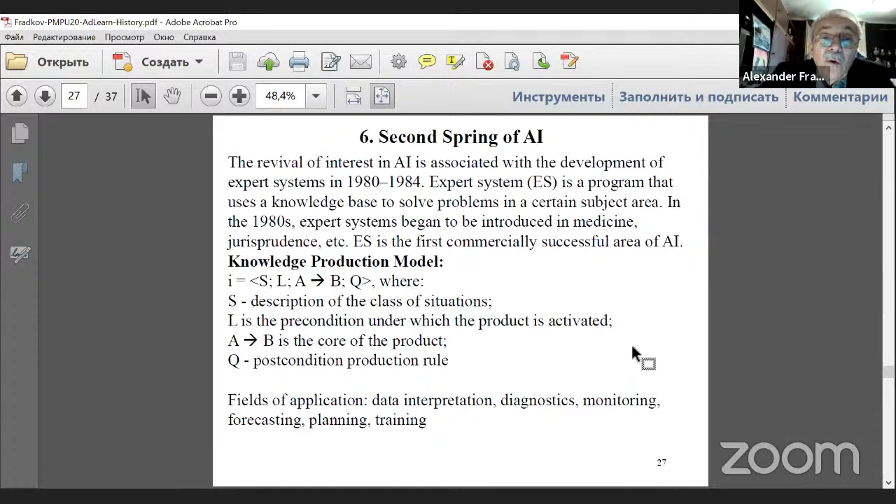Also at that time, some theoretical results were obtained, first by Fukushima, who proposed convolution networks. Then Paul Werbos was studying multi-layer neural networks and proposed a backpropagation method. Although several other people also introduced something similar to the backpropagation method, it really became popular after the works of Werbos in the beginning of the 80s.

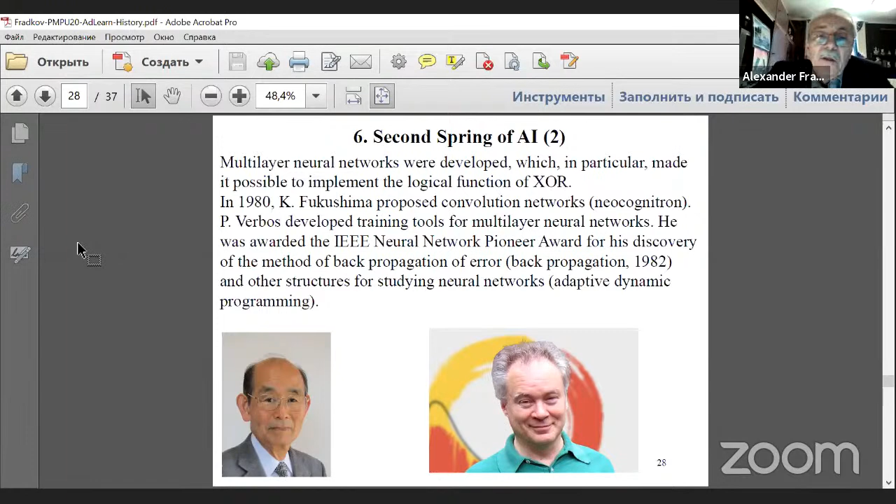So interest in artificial intelligence grew again. However, these expectations were probably too high. After obtaining some interesting results, not many practical results were obtained, and interest went down again. This time is called the second winter of artificial intelligence.

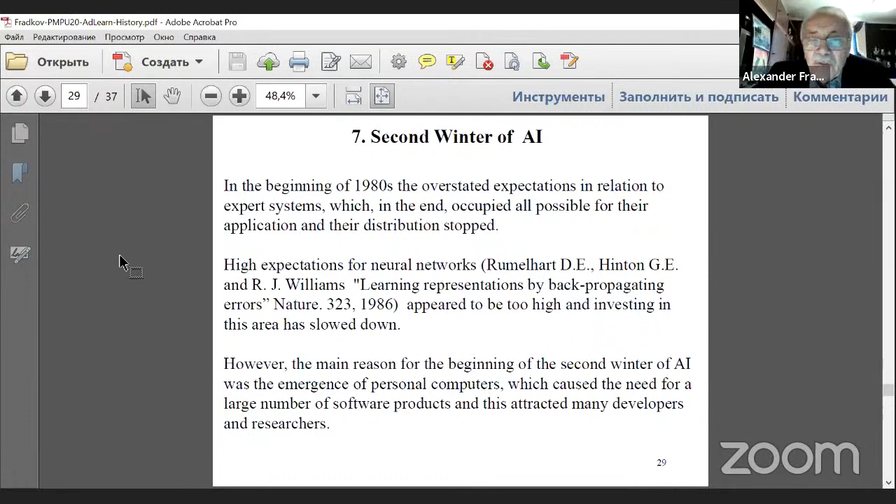Some people think that the main reason for the beginning of the second winter of AI was the emergence of personal computers at that time, in the beginning of the 80s, which caused the need for a large number of software products and attracted many developers and researchers to a different branch, personal computers and software development for them. Anyway, after some time, interest in artificial intelligence grew again.

This was in the beginning of the first decade of the 21st century, and it was a turning point in the history of machine learning too. There are again several reasons for that.

A synergistic effect of three synchronous trends: first, big data, the amount of data became so big that new approaches were brought to life very rapidly. Second, the reduction of the cost of parallel computing and memory, and the development of new technologies based on graphical processing, which market was growing very fast, so the cost of computation reduced dramatically at that time. Simultaneously, new algorithms for training multi-layer networks were developed, the so-called deep learning area. As a result, machine learning made great successes and became the dominating area in artificial intelligence at that time, gaining a lot of new applications.

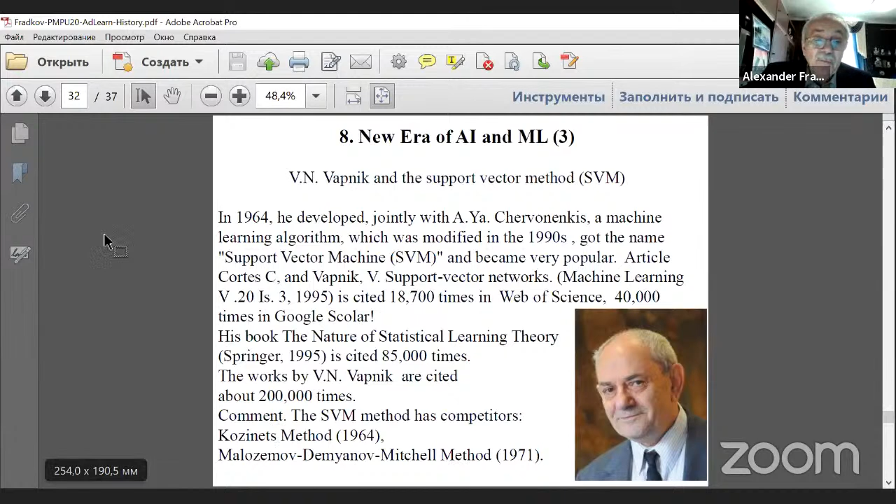Not many people know that some other methods exist that can compete with the method of Vapnik. They were invented and proposed in St. Petersburg, at that time Leningrad, in the 60s by Kozinets, and another method by Malozemov, Demyanov, and Mitchell in 1971. These are also part of history.

Coming to deep learning, we also need to remember that the first results related to this area were obtained in the Soviet Union, in Kyiv, by Ukrainian mathematician Alexey Ivakhnenko, and published in a number of papers in 1968.

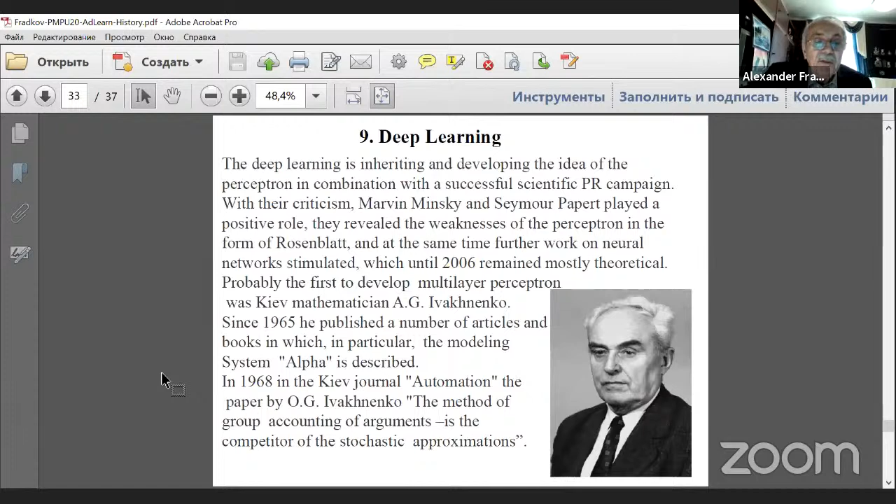Now, in the middle of the last decade, a critical mass of knowledge in the field of deep neural networks was accumulated. The leader of this area was Geoffrey Hinton, a British scientist who continued his career in Canada. Since 2006, he and his colleagues began to publish numerous articles on deep neural networks, including one in Nature in 2015, which became really huge, very popular.

Geoffrey Hinton himself now has almost 400,000 citations. He and his senior colleagues worked together in Canada at different universities and were also associated with huge companies like Google, Facebook, and Microsoft.

I mean, LeCun and Yoshua Bengio. So these three persons have become leaders in this area, and actually they live in Canada, and Canada has become a center of development of artificial intelligence now. And finally, their work was awarded by the famous award, the Turing Prize, in 2018. Turing Prize is sometimes called the Nobel Prize in computer science. So these three persons were awarded with a top prize in computer science.